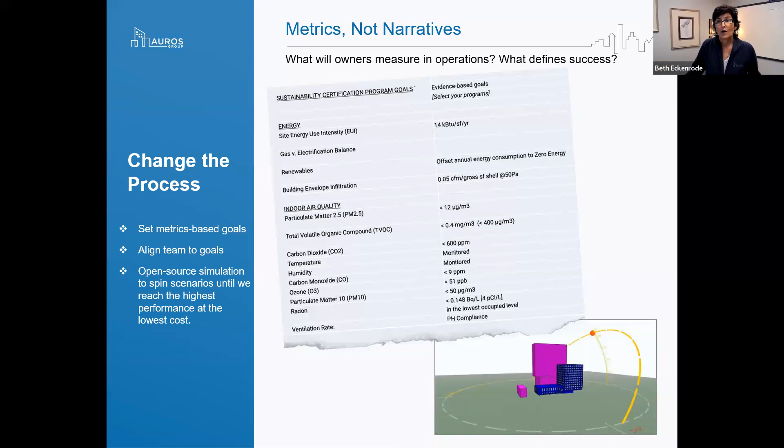This process fundamentally changes the conversation of how to get the most out of passive house. You'll hear me say a few times during the next hour, we try to wring out every piece of energy consumption we can. It's like taking a towel that you think you've wrung dry, but you really haven't—there's still more to get. Everything we can get out benefits every other decision we make. That's how we approach this entire conversation.

We talk about iterative evidence and iterative tools, used through conceptual into schematic into design development. We take detailed energy models and combine that with unit price control estimates—at the unit level, in a detailed way, not by square foot. We do iterations of this to make sure nothing gets away from us. We have control of all the different levers.

So at any point in time, we can answer for an owner, did you get what you paid for, with 3 pieces of information: one, what does a decision impact in terms of performance; how does a decision impact long-term operating costs; and how does a decision impact first costs?

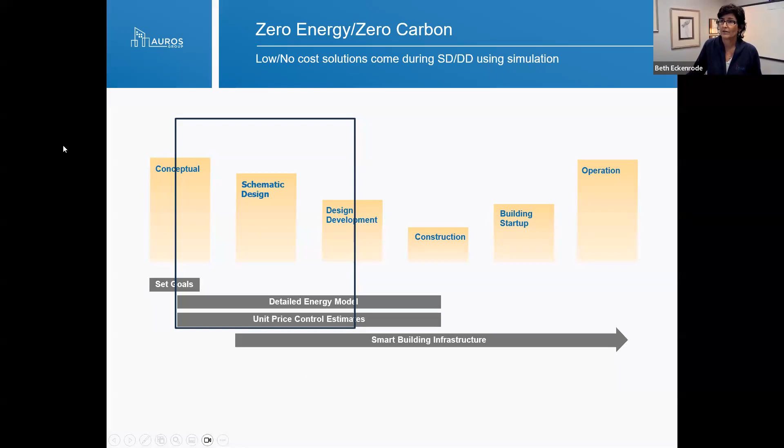For this discussion, probably one of the most important things to talk about is that we have a very unique approach to how we think about existing buildings. The very first thing we do on every project is determine the optimum decarbonization potential of a building. So instead of starting where most people start—what can we incrementally do to get better—we take a building and figure out what it's capable of achieving.

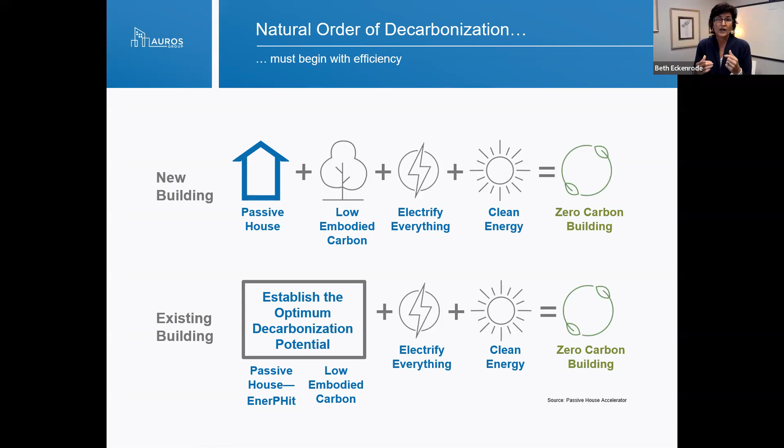Once we know what it's capable of achieving, we start trading up. It's looking through the prism in a different way, right? It changes the way you think about making trade-off decisions.

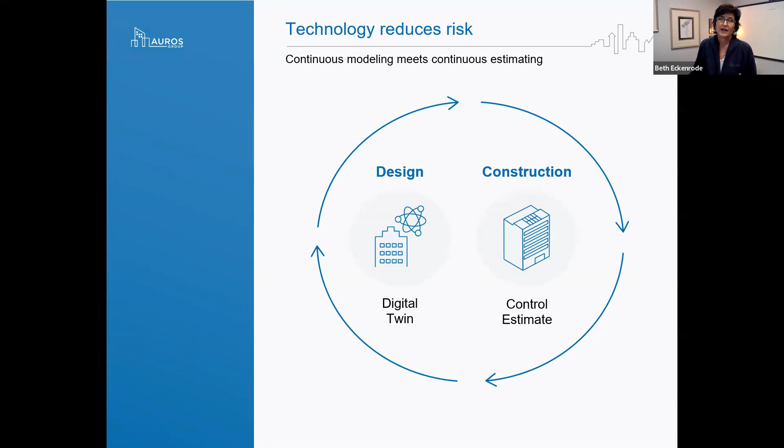And then we do the continuous modeling and continuous estimating that I was talking about earlier, because it reduces risk—it reduces technology risk, financial risk, performance risk. We do that consciously on every project.

We believe fundamentally that you do not have to spend $1 more to get a high-performing building. The thing we say is brick doesn't know it's in a passive house, and drywall doesn't know it's in a passive house. So there are things that we trade off by following this passive house standard and understanding how to get the most out of a building, and it shouldn't cost $1 more to do so.

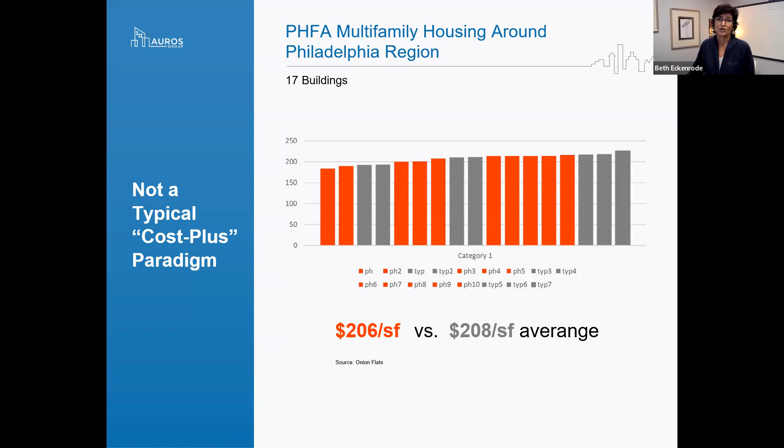We start with foundational elements. In our world, that's passive house and Reset Air. Why? Because it's the same building science that gets you to not only low energy, but really healthy and world-class indoor air quality—that's what we get out of the Reset Air standard.

In your world, well, we'll talk about foundation—we'll talk about CALGreen, and Matt will get into that a little bit more as he starts talking about some of our analysis. But your foundation pretty much always starts with CALGreen. In our world, I bring that up because if you don't know about Reset Air, it's the same building science—the 5 principles of Passive House apply to indoor air quality, and you get kind of a double bang for your buck. We'll talk a little bit more about that as we go.

So Matt, I'll turn it over to you. Yeah, sure. Thanks a lot, Beth.

Okay, so what we did for this presentation is we took a building that was a multifamily building pre-certified for the Passive House standard, and applied it across 4 different climate zones in California.

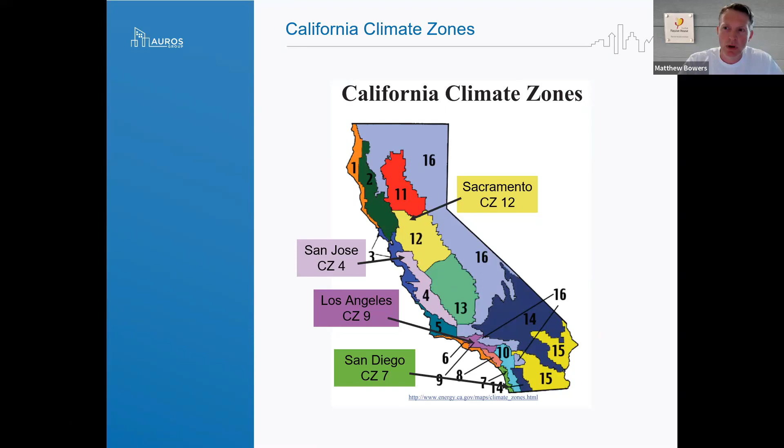So we started with Sacramento and went to San Jose, Los Angeles, and San Diego, just to see a baseline of how the building performs with code levels of insulation compared to the Passive House standard. Let's see what it's going to take for us to take this building from Title 24 all the way to Passive House certification.

And so what we ended up finding here, we're going to take a look at the results first, and then we'll get into what the inputs were.

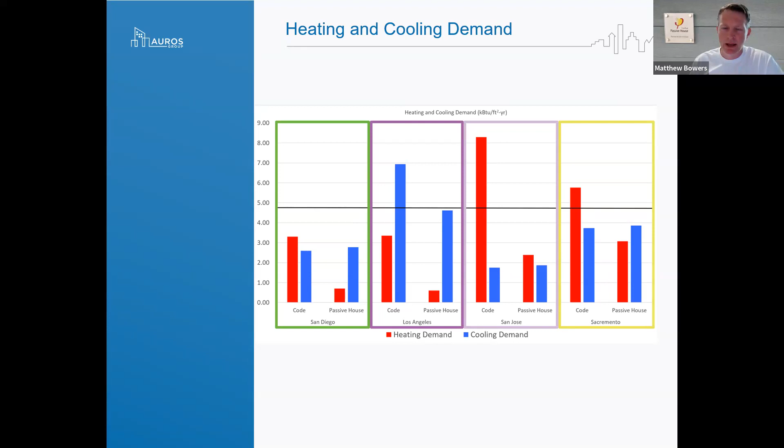On the next slide here, what we're going to see is source EUI, and I want to make sure we understand the difference between source EUI and site EUI. When we start talking about this net zero energy philosophy, source EUI becomes really, really important, and I'm going to dive into that on the next slide.

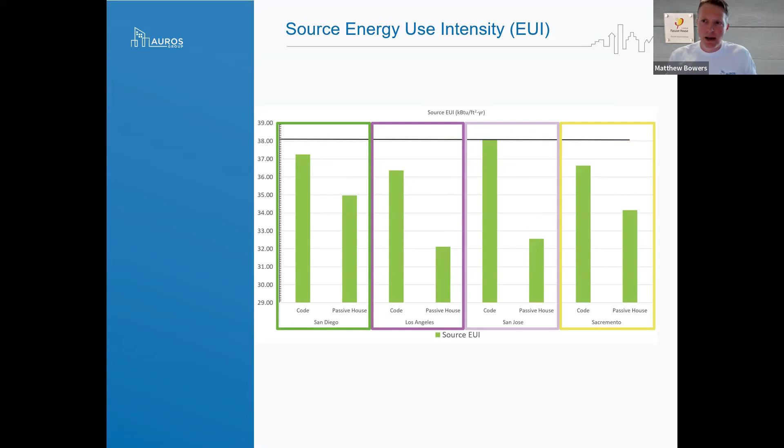On the next slide, we're going to take a look a little bit at the path to net zero—I should have said the path to net zero energy on the graph. So this is the path to net zero energy.

Now this graph gives you the percentage of roof area required to be covered in PV panels in order for the building to be net zero. And when I say net zero energy, I'm talking about site net zero, so the amount of energy turns out to be around zero over the course of a year.

When we start talking about that philosophy, first of all, we can never use 100% of the roof area for PV panels on a multifamily building. It's not feasible. We have rooftop mechanical equipment, and there's all kinds of other things going on. The roof is usually not just one roof, usually there's 2 or 3 different roofs. So it's not practical to say we have to use the whole roof. Any little bit we can squeeze out yields more room for mechanicals, roof drains, and everything else that happens on a roof.

In San Diego, we were able to reduce the amount of required area by about 5%. Each one of these is much easier to achieve net zero, so we're using fewer panels. We have the ability now to not have to cover the entire roof with PV panels, but that's not preventing us from doing so. It just means it's much easier for us to do it, and it costs less. We don't need to cover the entire roof with panels.

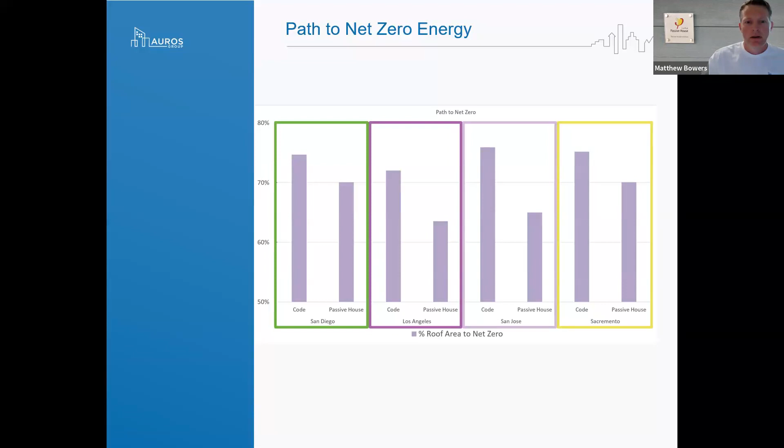And on the next slide here, what we're going to see is... you got that, Beth? Yep, okay, there it is.

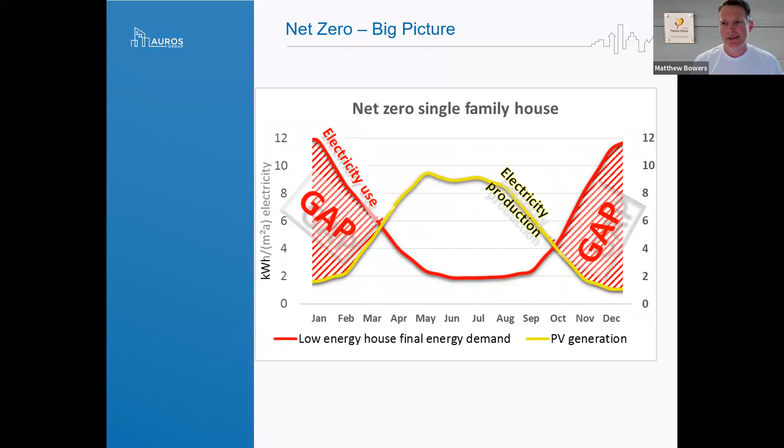So now this is for a single family house. Bear with me here, the graphic is still going to be the same thing. We've got 2 things that we're showing on this graph: we're showing electrical PV production. PV production here is this yellow line, and I'll follow it here with yellow.

During the summer months, we're going to create more electricity, so it's going to be a bell curve. Then what ends up happening with energy demand is the building is not going to require energy when we can make it. The sun is going to set, the winters are going to be long, the days are shorter — we just don't have the available solar energy out there in the winter. And when we're using electricity is usually during the winter, for heating, for water heating, all of those other things. So we end up with this big gap in these shoulder seasons.

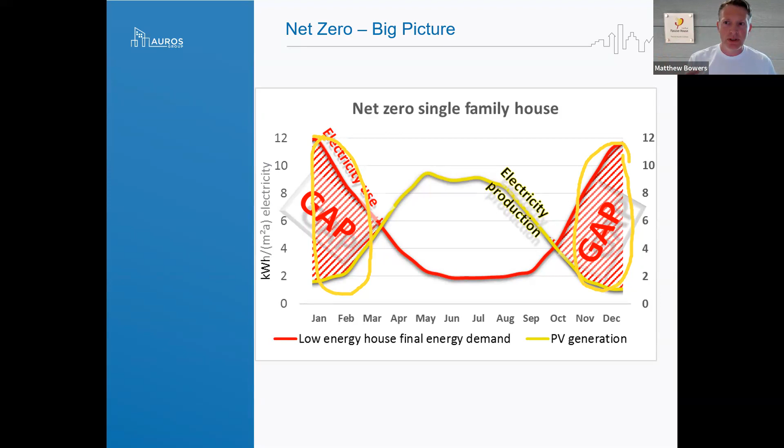When we start looking at a fully renewable grid, the gap we're seeing is going to have to lead to long-term energy storage. Long-term energy storage is going to be much, much less efficient than short-term storage. Batteries are a good example of short-term storage, but when we're talking about storing large amounts of energy over the course of a year, that's going to be extremely inefficient. So what we need to target is our source EUI, not our site EUI — our source EUI. When we target that, it's going to reduce this gap by applying passive house principles to a building.

We'll see that on the next slide. So that gap is gone — not totally gone, but severely decreased. This is going to give us a much more clear path to this long-term storage idea for our grid to become totally renewable.

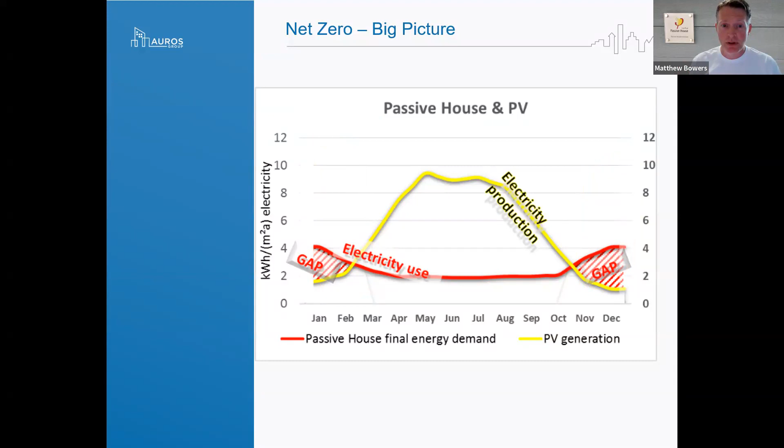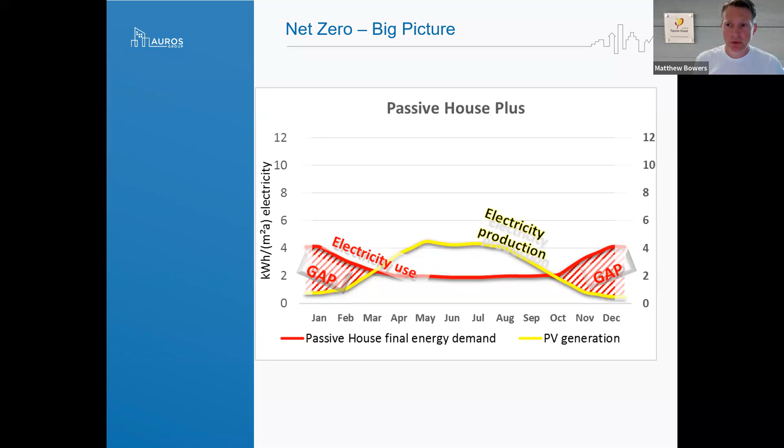And like I said, in the percent of PV required to be on the roof, now when our buildings are much more energy efficient, we don't need to create all this extra energy with all these panels. On the last slide here, we'll see we don't need as much solar on the roof. The gap is still relatively small — we're still net zero, but we're saving ourselves a little bit from a more intense long-term storage option for our grid.

So now we're going to talk a little bit about the building itself. Our workflows generally start with some sort of SketchUp model or some sort of 3D model, and what we can do is apply the principles and all of the different material properties to it.

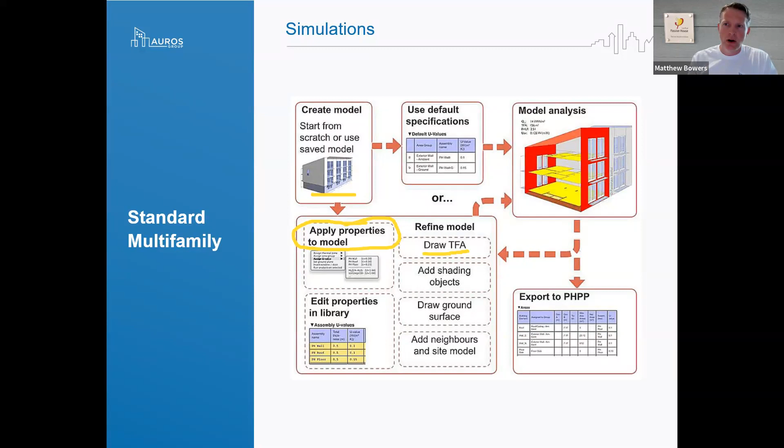So we'll start with our geometry. We're going to assign the properties, right? We're going to assign thermal properties, our R values, our U values. We're going to draw our treated floor area. And so now we can start having all of the basis for our energy model.

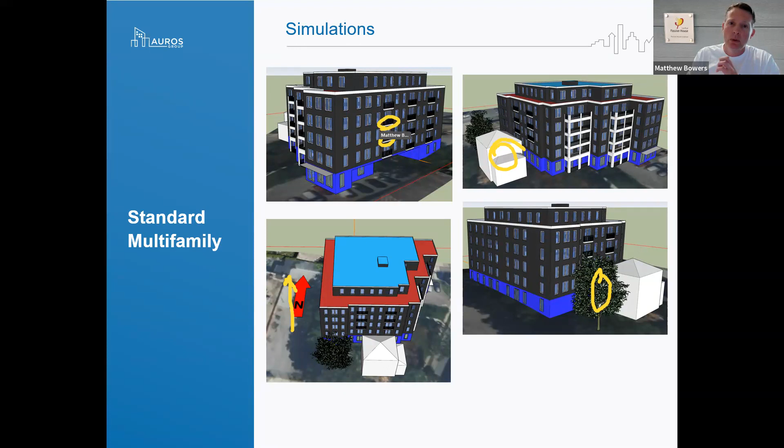We're going to set the orientation of the building. We're going to add any balconies or other shading elements to some of these windows. And once we apply all of these factors, now we can simulate the energy model.

And so what we're going to do is we're going to take each one of these windows and analyze it for its shading. And so what we're seeing over here, this little grayed out area, is the effect of this tree. Each one of these windows is going to get analyzed in a similar way.

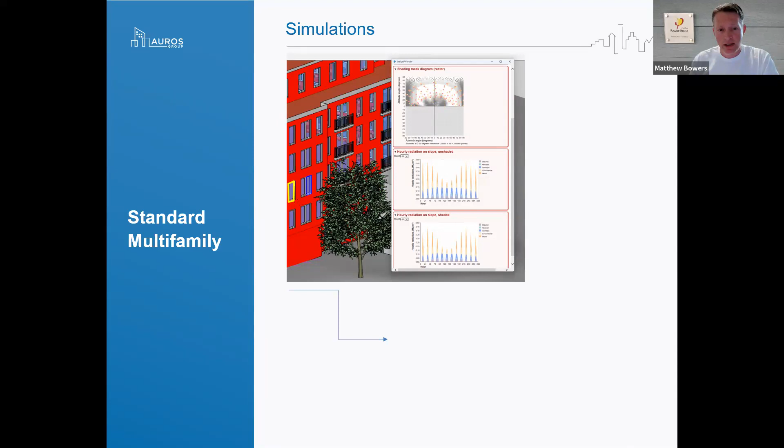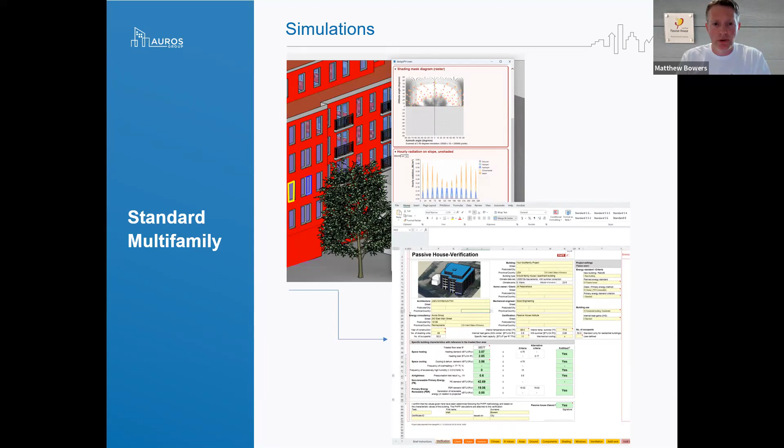And then we're going to take all of that information and export it to our passive house planning package spreadsheet. Once we get into the spreadsheet here, we can really go to town in terms of further analyzing different things. This is where we're going to end up modeling our ventilation systems and things like that.

So the building that we used for this analysis was a 49 unit multifamily building. It was roughly 43,000 gross square feet, 38,500 treated floor area. The building was all electric. It had a centralized heating and cooling system using VRF with air source heat pumps. The domestic hot water system was an air source heat pump with a domestic hot water circulation loop.

And one of the things that really benefited this analysis in terms of meeting passive house criteria without really changing a lot is the shape. This building has extremely good form factor. And as passive house designers, when we start designing buildings, this is the first place that we go. This is the easiest button to push. Let's make it a simple shape, because when we make it a simple shape, we need less insulation.

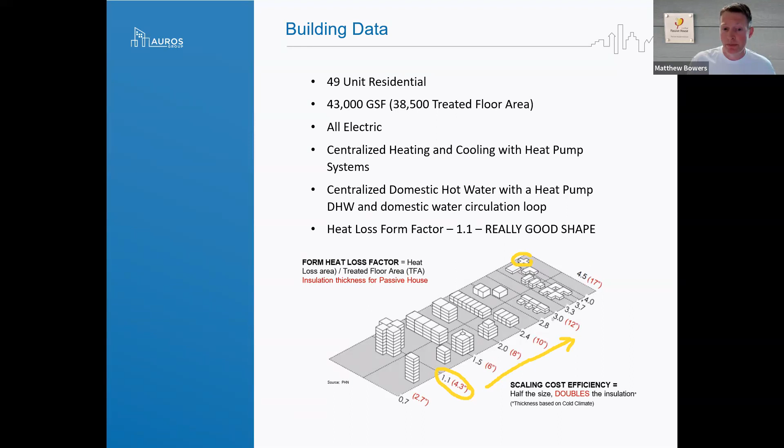And what this graph here is showing is the worse the shape gets, the more insulation we need. When our buildings look like a cross, we're going to need 17 inches of insulation, whereas if it was just a simpler shape, we might only need 4 inches of insulation. So the fact that this building was basically able to meet passive house criteria right off of the bat using Title 24 minimums really has to do with the form factor.

Our wall R values came right from Title 24, our mass floors and our slab perimeter insulation, if there was any required, our window U values. And what we went with was the maximum U value — like this is the worst window, and chances are the windows that everybody on this call is using are going to be slightly better than the worst windows anyway, because if they're right on the borderline, you're probably not going to sell too many windows. So the windows that we used in the energy model were the maximums required by Title 24.

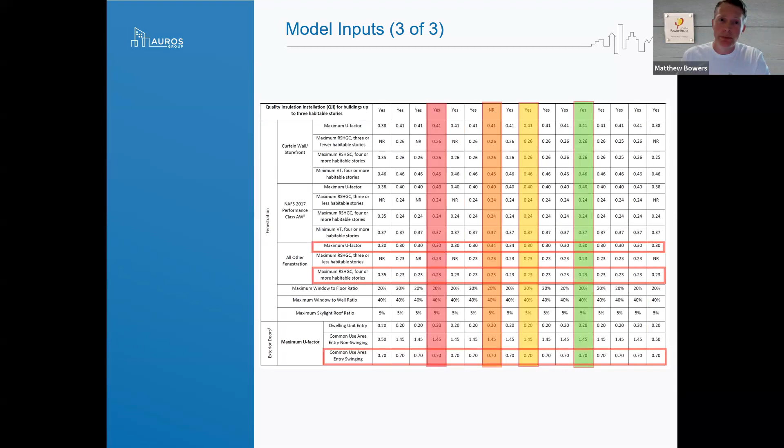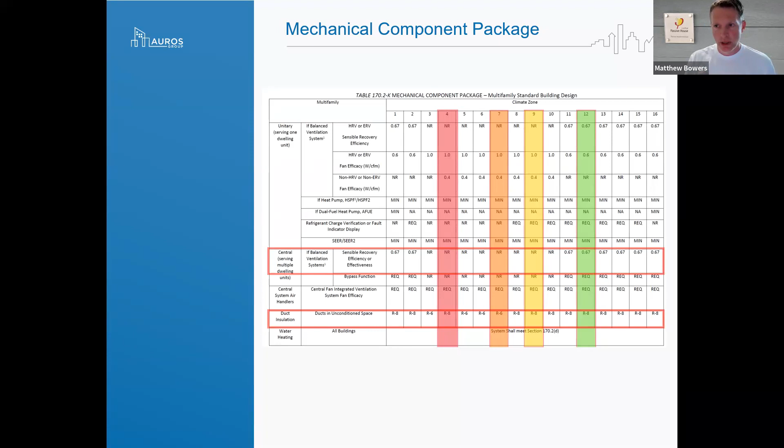And so once we apply all of these things, now we apply our mechanical systems. So we've got balanced ventilation systems required, maybe not with heat recovery, but some sort of ventilation system is required per code, and the duct insulation is required per Title 24. So we applied all of this information to generate our code-based models.

And what we found was, and we'll start with San Jose and work our way to Sacramento, what we needed to do in San Jose was slightly improve the window U values. Passive house windows are somewhere in the U 0.16, 0.17 range. We only needed to go down to a 0.28, which is still a double pane window. Solar heat gain coefficient of the glass or of the window was 0.23. We defaulted to 75% heat recovery, which is a passive house minimum.

We could probably get away with a little bit worse, but for the purposes of this presentation, we just wanted to go with the minimum requirement for product certification. And we're building a tighter building, right? Air tightness, heat recovery, and slightly better windows drop us into certification criteria. When we look in San Diego, all we needed to apply was heat recovery, the other requirement for passive house.

Again, easy buttons, we didn't change any insulation anywhere. In Los Angeles, a slightly better U value, a 0.31 U value. We had to apply exterior shading devices. Exterior shading devices are much more effective at keeping that solar energy out. They're about 80 to 90% effective compared to interior shades, which are only about 10% effective.

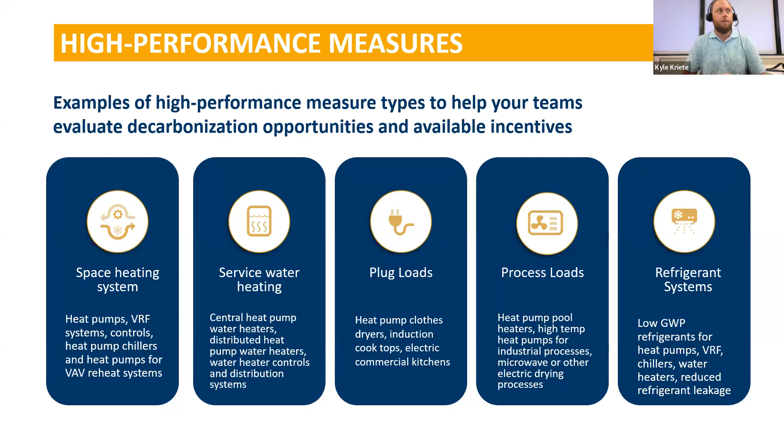So how do we go about calculating our incentives? Well, you have the participation bonuses and whatnot. We have our discovery meetings, which is just tell us about your project, and we can put together some of the modeling for you as well. Then, as I mentioned, we go through and calculate what the final incentives would be, based on whether it be energy savings, or how much low GWP refrigerant you have, or the specific design.

So we try to make it as painless as possible for the process. But the main goal is to be more efficient than code, and we want to try and help PG&E and the codes and standards divisions push California even further in the future. Hopefully not too quickly - that's a personal thing, but yeah.

So the incentive process: you commit to implementation, we ask that you share some design information. Pretty standard, as you know, if you've been through any previous energy efficiency programs, you'd share some information with us. You go through and install the equipment. We'll do some verification. There might be a little data sharing requested, but it's typically things like run hours or how much energy is being used - a little more granular than what you could get out of your whole building meter.

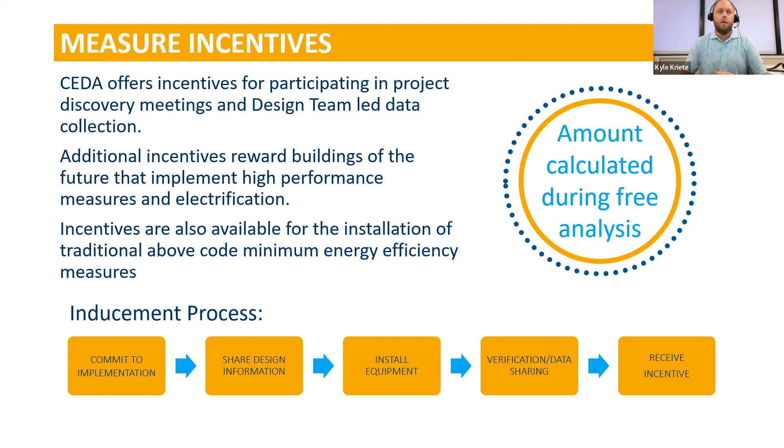If you have any questions, I think I'm going to hand it back over now to Beth, and I'll be here if you have any questions for me as well.

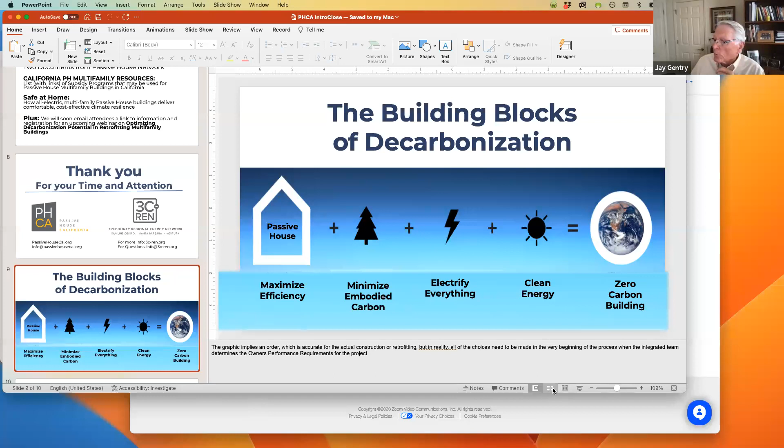I'll go ahead and share my screen. I do have a couple of comments and things coming up. You saw this during Beth's presentation, but I like to seek here that California is among the leading states in the country in terms of our decarbonization, and the building blocks of decarbonization are to make the building as energy efficient as possible, to minimize the embodied carbon in what you're doing.

Then electrify everything, put in clean energy, and you get the zero carbon you're looking for. It implies that these happen in this order, and that is true in terms of when you're building it and doing a thing. But the really important thing is up front: you need to decide what you're going to get in terms of your owner's project requirements or owner's performance requirements in terms of efficiency, embodied carbon, whether you're going to go all electric, and how you're going to do your clean energy. So these things are additive, but they all move forward to the beginning of the decision when you get your integrated project team to look at it.

Basically, this is both mitigation and adaptation to go to this level of efficiency. It's for the people on the planet, and the question is not why would you go to Passive House or to this high performance. The question is why would you not?